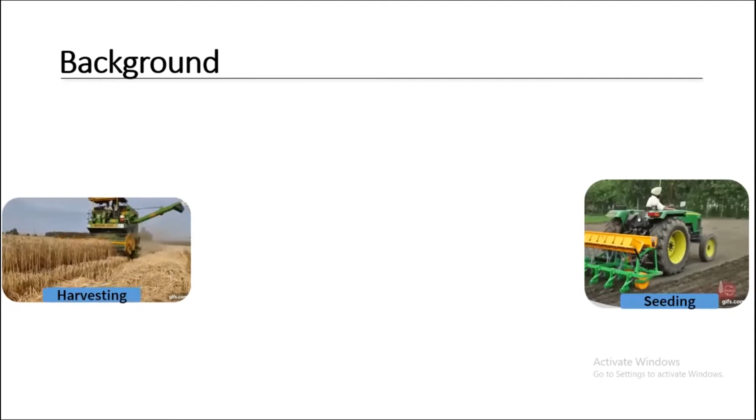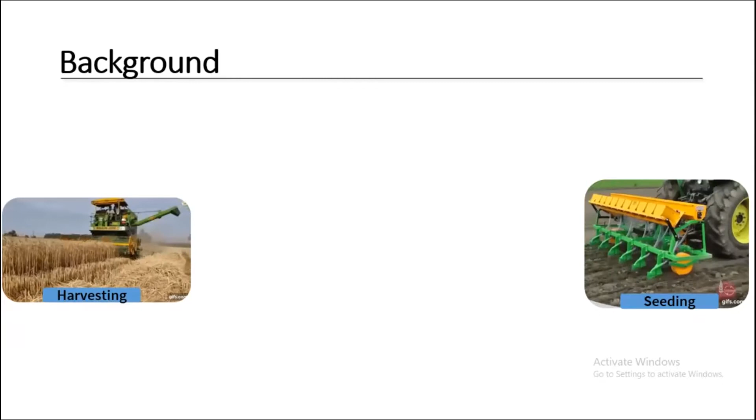On the left you can see a combined harvester harvesting the paddy crop. After that, we can see the stubble that is left on the field, and the farmer would require the land for seeding in a 15-day time period.

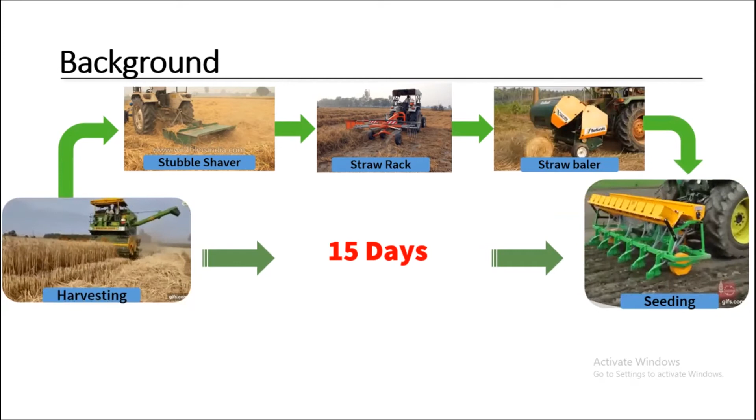So the conventional way for the farmer to get his land done is he should use the stubble shaver, straw rake, and straw baler. Or more likely, farmers are preferring to burn the crop and get their land ready for seeding.

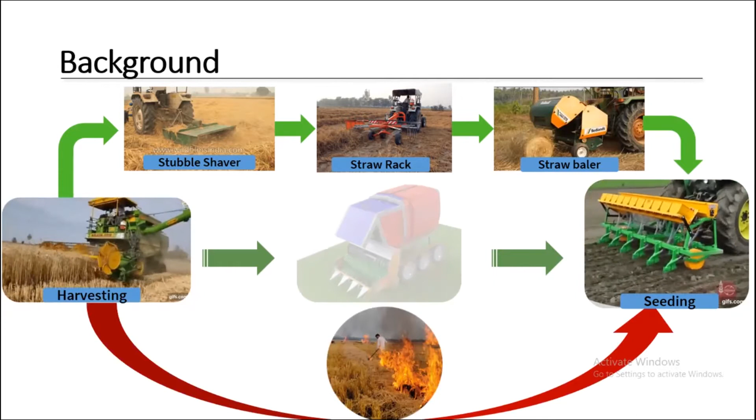So here we are proposing a single shot solution that can directly help the farmer get his land prepared in less time. These are the combined machineries that are available in the farmlands.

So for the problems, we have developed a novel cutting mechanism that can help the farmer cut the stubble from the ground level.

Regarding the applications of this paddy stubble, after harvesting it can be used in many other applications such as biomass industries, pellets, or even as a replacement for construction materials, or cattle feed.

So the problem lies here: how to get the stubble from the farmland to industries where it can be processed for all these applications in a short time window.

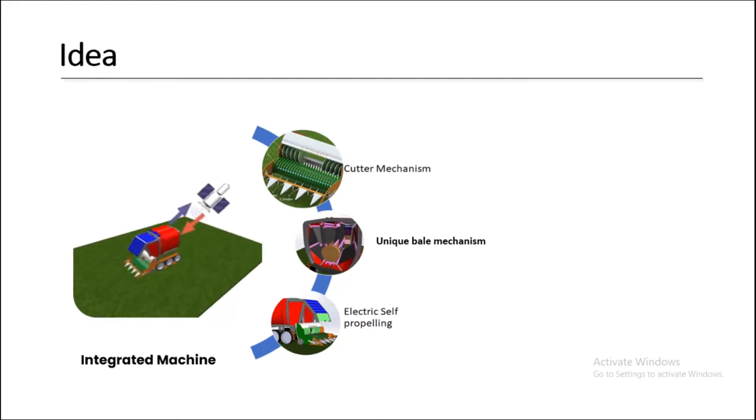So the idea behind our invention is an integrated machine that can do all three individual tasks: cutting, collecting, and making it into easy-to-transport bales. This is the machine that we have developed, and we have patented the method for making the bales.

This has proven its advantage in many other aspects. The conventional balers have many mechanical drawbacks which farmers don't use because of that. So we have developed a unique bale making mechanism that addresses all these problems.

Another important key feature of the machine is the autonomous feature. The machine can be driven in a farmland on its own. The farmer has to feed the location of the farmland, and the machine has its own path planning, perception, and response to obstacles.

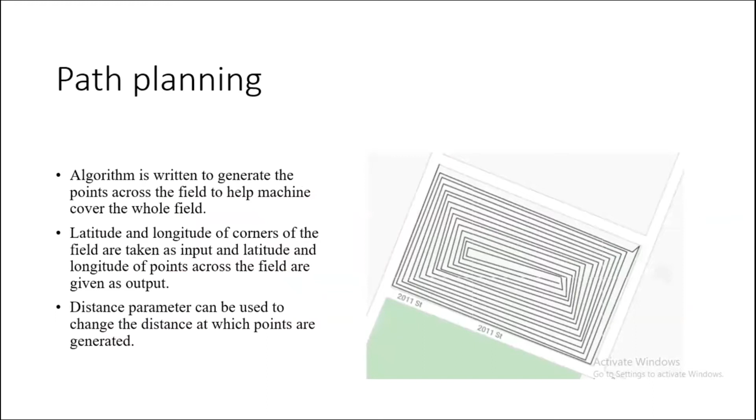So here we are presenting a small example for the path planning. Once the farmer has selected his farm location based on the digital UI given to him, the algorithm will generate a spiral path in the farmland.

Here is an example. We have selected the four coordinates on the land, which you can see on the right, and the algorithm generates a spiral path here.

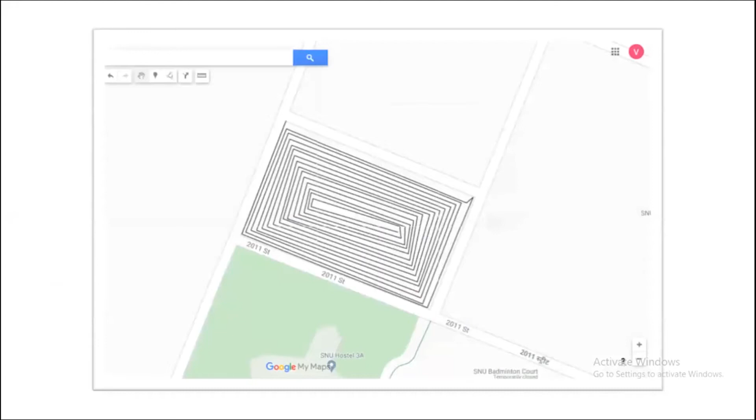This is an example from a cricket ground that we have in our college, and we have selected four coordinates of it. So this is the path generated. Once the path is generated, the machine will be driven along this path on its own.

So we have completed the path planning and the perception of this machine. Now for the response to generate the machine to move in the given selected path, the machine is equipped with high torque BLDC motors along with a motor controller. So the path generated will be loaded into the motor controller, and the machine will be driven in the path accordingly. So this is the design of this machine.

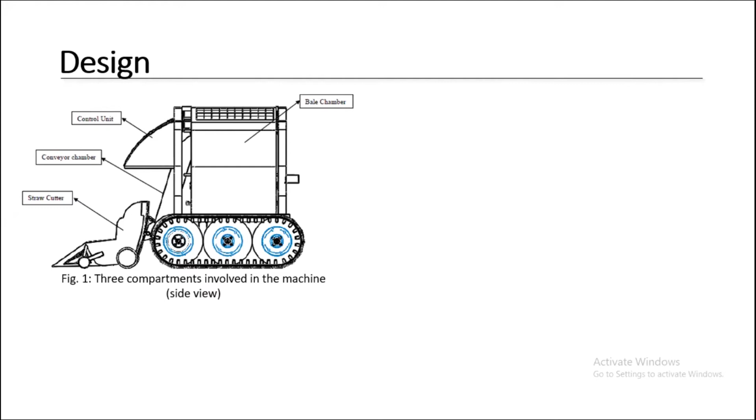The machine includes a cutter, a conveyor, and a bale chamber. So once the stubble is cut, it will be transferred to the bale chamber via the conveyor, and we have a control unit in the front of it. The control unit will be powered using the solar panels mounted on top of it.

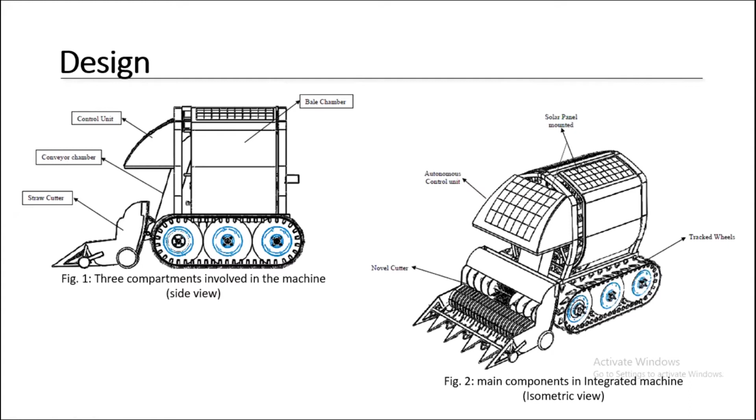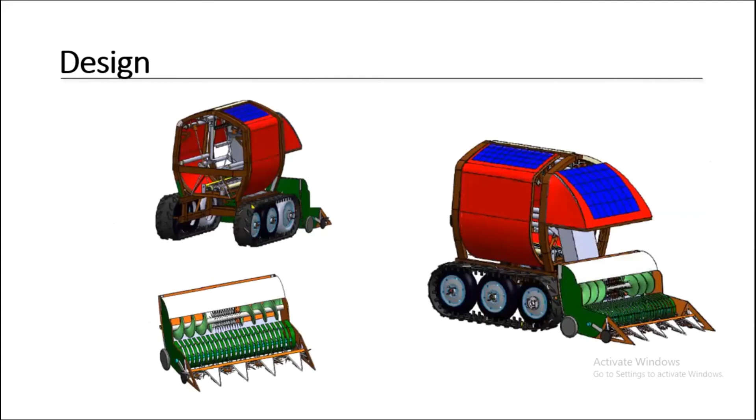This is a unique cutter design that we have developed. The advantage of this cutter is the stubble can be harvested from the ground level, leaving around a 2 inch gap, which is required by the farmer. So this is the design of it. Once it is cut, it is transferred to the conveyor attached to it.

So these are the current progress. We have developed a prototype of this machine, and we have done some primary testing.

So our vision is to reach a goal of serving farmers using technology and feed the growing population. This is our team.

Vaibhav graduated in 2021 and has 2 years of industry experience. Myself, Rakesh, and we have robotics control engineer Amit. And here are the advisors: Dr. Ankit Gupta, he's a design advisor, Dr. Shantram Mitra, he's a robotics professor, and Dr. Jyotika Sharma, he's a professor with 50 years of experience in environmental engineering.

So we are backed by Shiv University. The complete project has been funded and supported by the university, and we also received recognition from Niti Aayog for making this into a wide scale and launching it into the market. And we received technical support from Altair for doing the simulations and finding the functionality of this machine.

Before concluding, currently we have extended this project to the stubble managing ecosystem, which includes, after harvesting the bales, converting them into small, tightly packed pellets in the farmland itself. For that ecosystem, we are currently working on a bot that can help collect the randomly fallen bales and place them into a dock station in the farmland, where they can be easily converted into any other form.

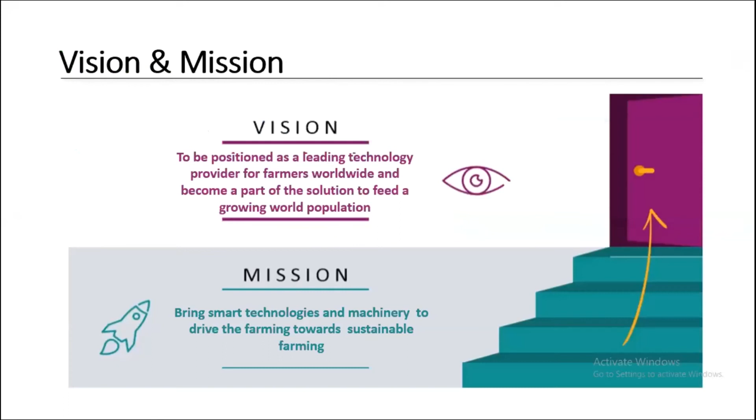Hello Rakesh, Mahendra here. I have a couple of questions. One is regarding this path planning and navigation. You have used GPS here, right? But GPS location accuracy is about 1 to 2 meters. So to reduce that, which kind of alternative system have you used to minimize the location error?

Right, so actually sole GPS cannot be used for making this path. You are right, GPS has about 2 meters of error. So to avoid that, we are using multiple sensor data like IMU and computer vision. We are fusing all three data using a Kalman filter, filtering the error, and achieving this kind of path.

Okay, so suppose GPS is not working, will your system still be able to navigate?

GPS should work when the farmer has to load the coordinates. Here we can see the coordinates, right? So the farmer initially has to feed the coordinates. Once the path is generated, the machine can be navigated using the computer, the camera, and the wheel encoders itself. So it doesn't require GPS later on, but initially it is required to be in working condition.

And inside, you have generated many paths, concentric paths. For what purpose, and what kind of algorithm have you used for that?

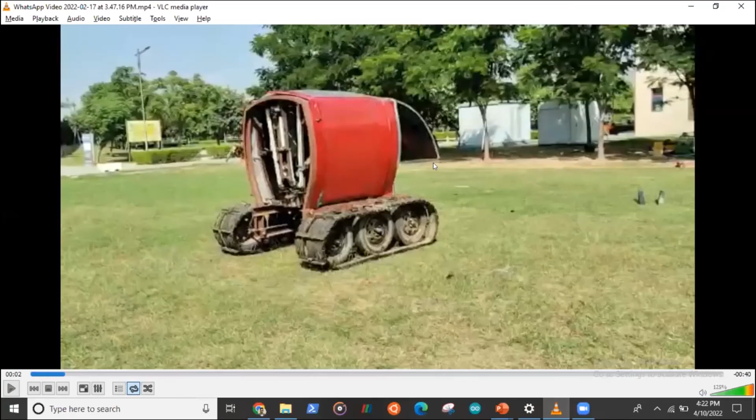I can show a video here, a video of our testing. Can you see my screen here? Yes. So let me show this video.

Here is the size prototype. This is the initial testing and we see a lot of vibrations in this machine. So now we have rectified that. This is currently tested using the remote and the GPS.

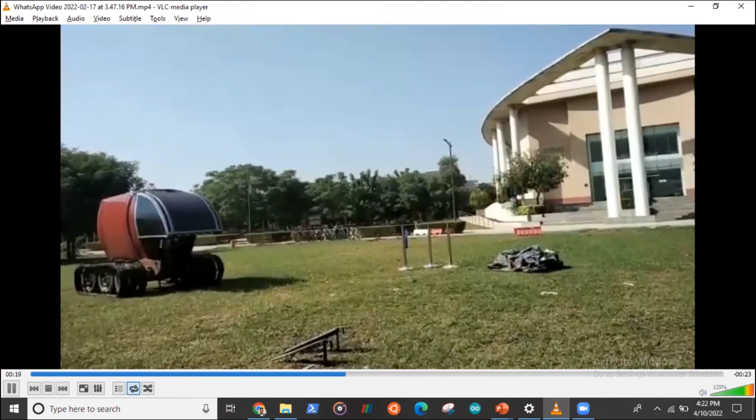So you have used the BLDC motors, the hub motors, BLDC hub motors. Right. And what will be the approximate cost of this system if anyone was to procure it?

This prototype has used 1.5 lakh, but once we are planning to launch in the market, we are trying to approach government and provide subsidies over it, and then we can bring the cost further low. Understood, thank you Rakesh.

So from the audience, Aniruddha, I have some question please. I'm sorry, just one short question. Hi Rakesh, that was a wonderful presentation.

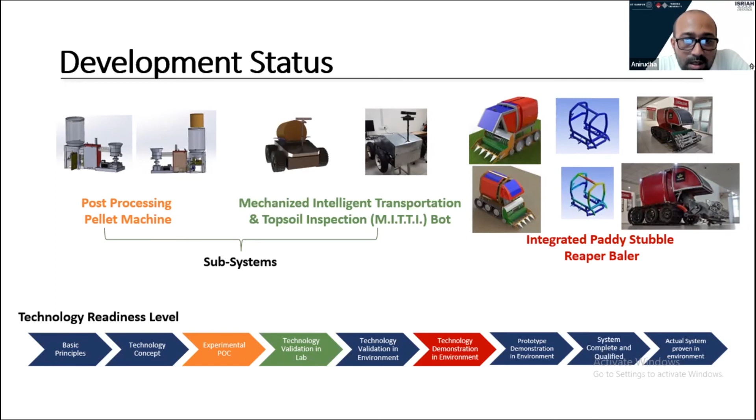Since this proposition is for stubble burning, I want to know the actual capacity of stubble it can remove over time. Did you try it with the stubble? Because stubble is a very hard thing, right, so how much volume can it remove in an hour or in a minute?

For this prototype, we have selected data. It is calculated that on average, 1 hectare of land consists around 4-5 tons of stubble. The machine can harvest one hectare of land in around 80 to 90 minutes, and we are achieving almost 80% rate of harvesting. So accordingly, we can calculate the amount of stubble that we can harvest, which comes to around 3 tons of stubble collected from a hectare for every 90 minutes.

Thank you for that. I have one short question. Can I? Yes sir, yeah sure. Rakesh, I'm having one question.

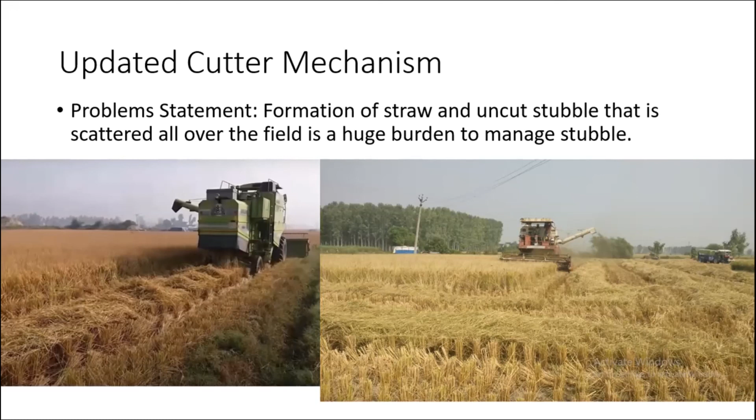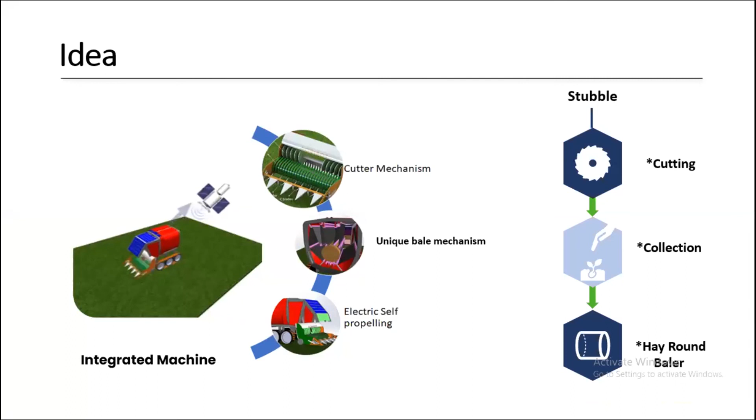What kind of electronic and computation hardware have you used? For electronic hardware we are using Jetson Nano for the control unit part, and for the electrical part we are using 2 kilowatt BLDC motors.

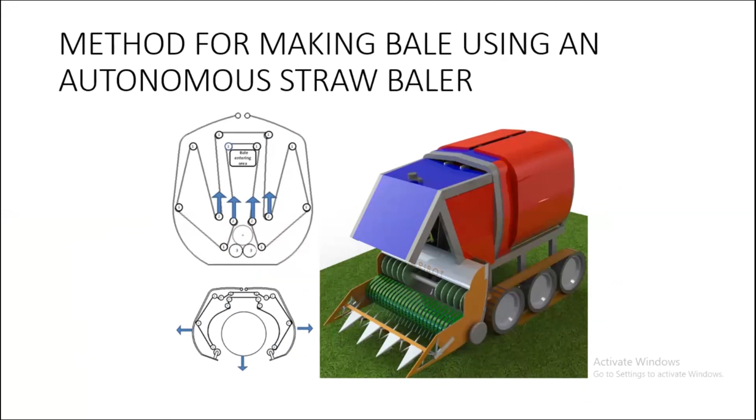This is a skid steering mechanism, so the steering will be done as a replica of army tankers. Let me show the image.

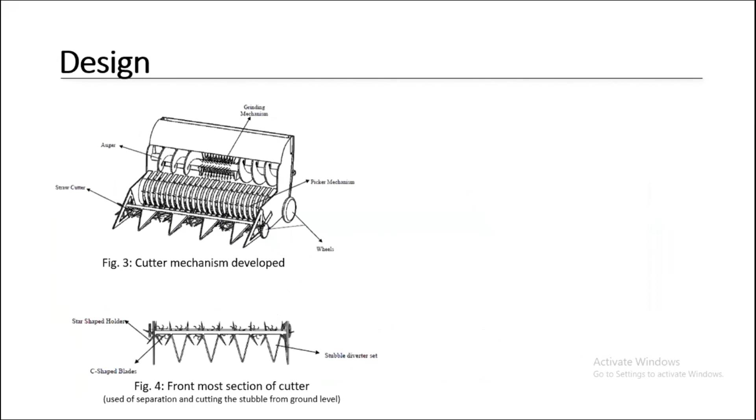Your voice was breaking - is it Jetson Nano you are using, as specified? So, can a single Jetson Nano work for the whole system? It can work. We are using Jetson Nano for the path control of the machine. For the rest, for the internal electronics, we are using Arduino Mega.

So there is no vision based system? No, we have a vision based system. We are using Jetson Nano and a stereo depth camera for finding obstacles and calculating and rectifying the path accordingly. And which part of the country are you testing this prototype in?

In North India, we are currently in Noida, Uttar Pradesh, but the major problem of stubble burning is happening in Punjab. So we are going to take the machine and demonstrate it in Punjab soon, targeting this coming stubble harvesting and burning season, in November.

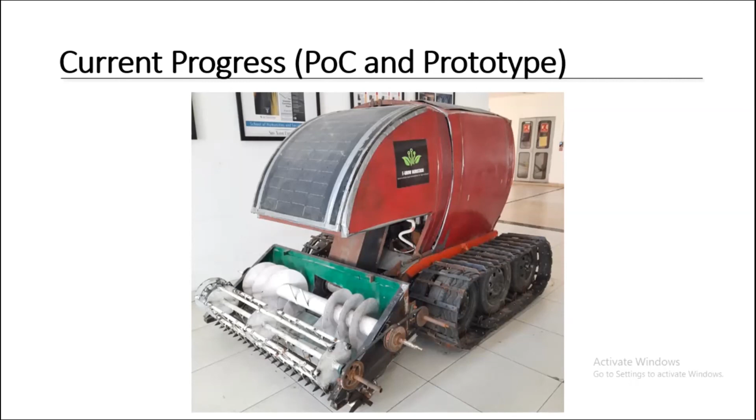So your company is based in Delhi? Right. Okay, thank you very much Rakesh. Thank you sir.